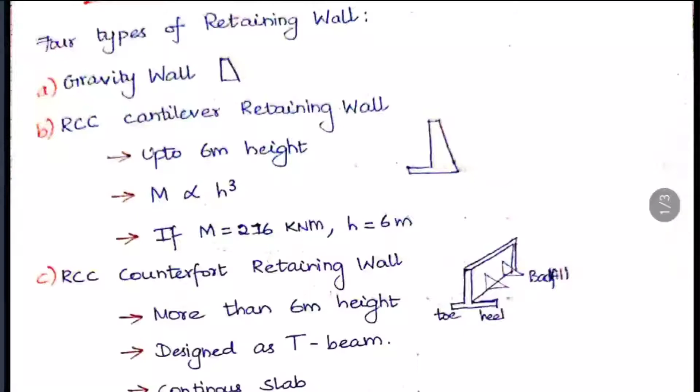So gravity wall is nothing but it is just like a wall like structure, so that it just obstructs or it just holds the soil in one side. And the next is the RCC cantilever retaining wall. So it has a cantilever slab like thing at the bottom, so that the holding capacity will be more for this type of retaining wall. So if the height of the retained soil is up to 6 meter, we will be going for this type of retaining wall.

So here they tell that the moment that is occurring here is directly proportional to the cube of the height of that retaining wall. So in general they have given this example, that is if the height of this is 6 meter, its moment will be 216 kilonewton meter. And then the third type is RCC counterfort retaining wall. So this type of retaining wall has to be constructed if the height is greater than 6 meter.

Okay, so this looks as a T-beam. So in the cantilever retaining wall we saw just one slab in this one side. So here there will be another thing also like T-like structure. In this T-like structure, the shorter thing will be called as toe slab and the longer thing will be called as heel slab. So this will be your heel slab and this will be your toe slab, and this straight part they will call it as the stem of the retaining wall.

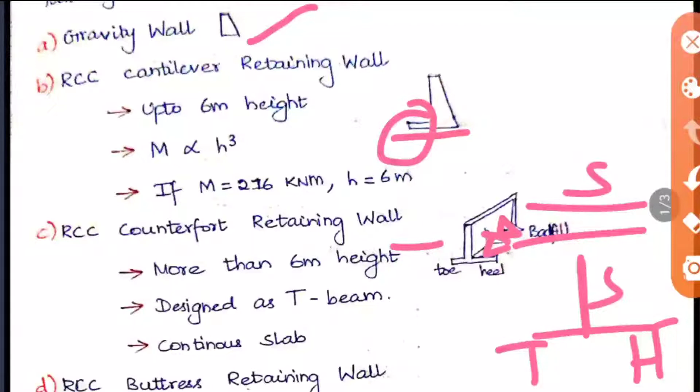The next type is the buttress retaining wall. So here it is designed as a rectangular beam. It is also similar to the counterfort retaining wall, but the only difference is, the counterforts we saw in the side of the backfill, that is in the side of the heel slab. In this case it will be in the opposite direction, that is in the toe side only the buttress walls will be there, and that side only it will be empty or having the water. So it is just an opposite structure here.

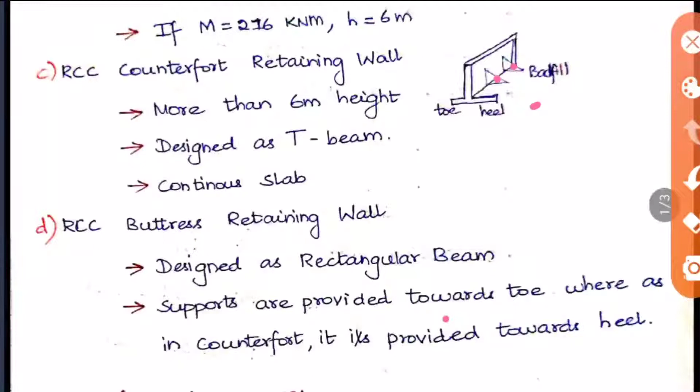So you can see the supports are provided towards toe, whereas in the counterfort it is provided towards the heel slab. So next we are going into the earth pressure. The coefficient of earth pressure is a term used here. It is denoted as K, which is equal to sigma H by sigma V, that is the horizontal stress sigma H and the vertical stress sigma V. This is considered in the soil that is retained in the retaining wall.

Okay, so there are three conditions: at rest, at active pressure, and at passive pressure. So first let us see at rest. At rest, the retaining wall will be stationary only, and there will be no lateral movements in it, so that there will be no yielding in the soil mass also.

So the condition is elastic equilibrium, that is, sigma H will be equal to sigma V. So both the stresses will be equal, so that it will be in a stable position. So here K is denoted as K naught, which is equal to mu by 1 minus mu. So mu is nothing but the Poisson's ratio of the soil mass, and which is equal to 1 minus sin phi.

And the next comes the active pressure. So the active pressure will be a lesser pressure than the pressure at rest. So here plastic equilibrium occurs, that is, the retaining wall moves away from the backfill. Okay, so if this is the retaining wall and here the backfills are there, it will move away from the backfill. So here the tension occurs, so the yield is happening due to the tension. So let us see how this happens.

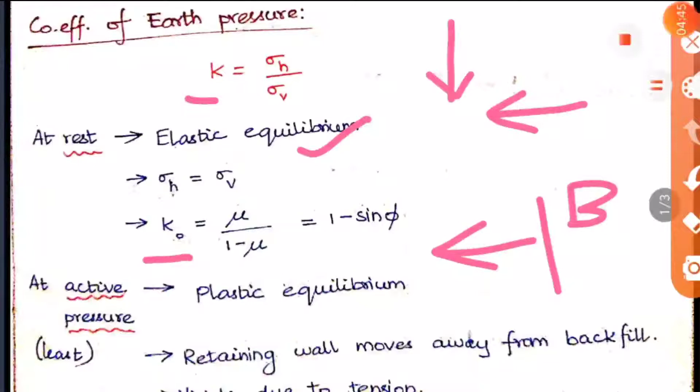So this is the retaining wall and this is the backfill area. Okay, so here sigma V will be greater than sigma H. That is, the vertical stress will be more than the horizontal stress. So when the vertical stress is more, the failure is downwards only, and also this structure moves away from the backfill. That is, the retaining wall moves away from the backfill.

So these 3 points are very important. You should know these 3 points in the case of active pressure and also in the passive pressure. That is, vertical stress is more here, the failure always occurs downwards, and the retaining wall moves away from the backfill. So these 3 you should know.

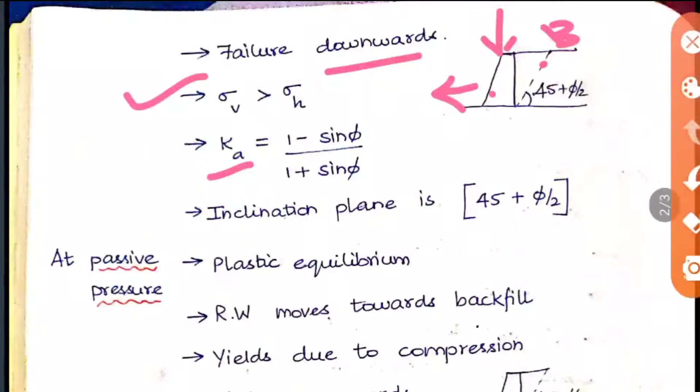So here K is mentioned as Ka, which is equal to 1 minus sin phi by 1 plus sin phi, and the inclination of the failure plane is 45 plus phi by 2. The angle is 45 degrees plus phi by 2.

The next one is the passive pressure. So here it is a plastic equilibrium only, and the retaining wall moves towards the backfill. In the previous case it is away from the backfill, here it is towards the backfill, and the yield is due to compression, whereas there it is due to tension, and there the failure is downwards, here the failure is upwards. So these points are very important.

Okay, so here sigma H is greater than sigma V. So in this direction or in this direction, sigma H will be greater than sigma V. Okay, so when the horizontal action is greater, the failure will be upwards, and also the retaining wall moves towards the backfill only.

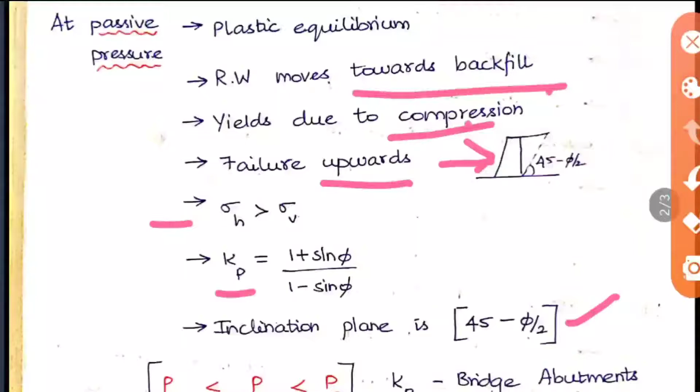So here it is represented as Kp, which is equal to 1 plus sin phi by 1 minus sin phi, which is the opposite or the inverse of Ka, because in Ka we saw it is 1 minus sin phi by 1 plus sin phi, and the inclination plane is 45 minus phi by 2, whereas there it is 45 plus phi by 2. So when you compare these both and study, it will be clear. So these 4 points are very important, they will be asking objective questions from these concepts.

And here the relation between the pressure and the coefficient of earth pressure is given. As I told before, the active pressure will be lesser than the pressure at rest, which is lesser than the passive pressure. And in the case of the coefficient of earth pressure also, it is the same. Ka is less than K0 and K0 is less than Kp. So here K0 is at rest. So normally for bridge abutments the case is at rest, for retaining walls normally it is active pressure, and for sheet piles it is normally passive pressure.

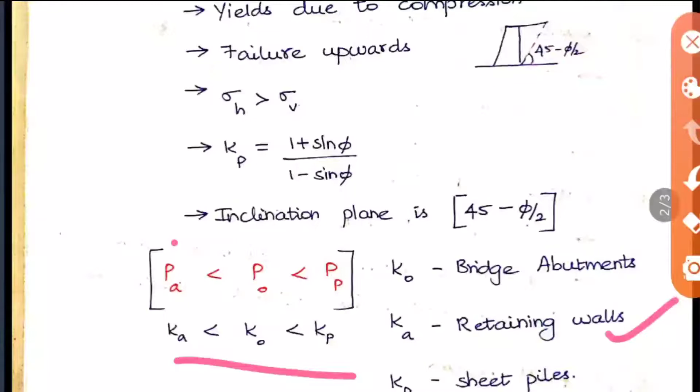Then comes the analysis of earth pressure. There are various analysis methods used here. The first one is Rankine's theory. In Rankine's theory there are some assumptions, so this is also important.

They consider the soil is homogeneous, dry and cohesionless, the ground is horizontal or inclined, and the retaining wall is smooth and vertical. This is important. Then plastic equilibrium occurs here. They also define Ka equal to tan²(45 − φ/2), and Ka into Kp is equal to 1. We saw this already: Kp is the inverse of Ka, so multiplying them we get 1.

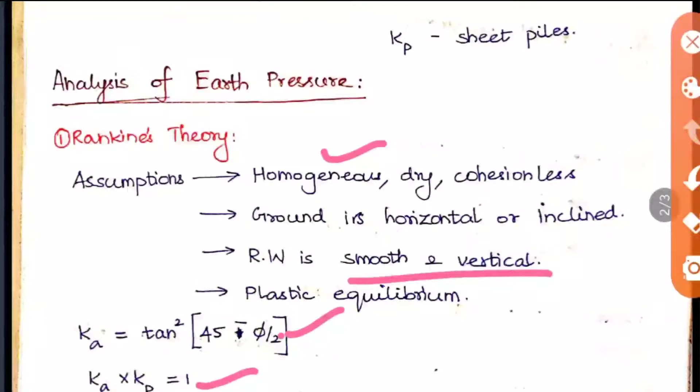The next one is the effect of cohesion. Here the passive and active pressures are given in terms of cohesion: Ka σv − 2c√Ka, and Kp σv + 2c√Kp. They will ask questions like how the active or passive pressure gets affected by cohesion.

You should answer like this: due to cohesion the passive pressure will be increasing, and due to cohesion the active pressure will be decreasing, because here minus and here plus is there.

The next is the tension crack depth, defined as Zc. What does tension crack depth mean? Because of the negative pressure, a tension crack occurs in the soil near the top of the wall at a depth of Zc. This depth we call the tension crack depth, which is equal to 2c/(γ√Ka), or 2c/γ into tan α.

The next term is Hc, that is critical height. It is related to this. It is the height up to which we can excavate the soil without support. If we excavate without support, at a certain point sliding of the soil happens. Up to that point is called the critical height, which is equal to 4c/(γ√Ka). Comparing both, you can write it as 2 into Zc.

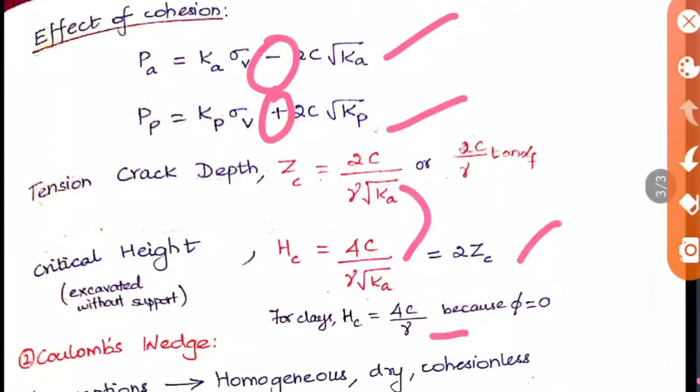The next theory is Coulomb's wedge theory. Here the assumptions are the soil is homogeneous, dry and cohesionless. The retaining wall is rough, whereas in Rankine's theory we assumed the retaining wall is smooth. These are important points.

Then the lateral pressure acts at an angle δ. These δ values are very important in Coulomb's wedge theory, so you should study them. For smooth walls it is φ/3. For retaining walls and concrete walls it is 2φ/3, which is Terzaghi's value. For a backfill subjected to vibration it is 0, and for rough walls it is 3φ/4.

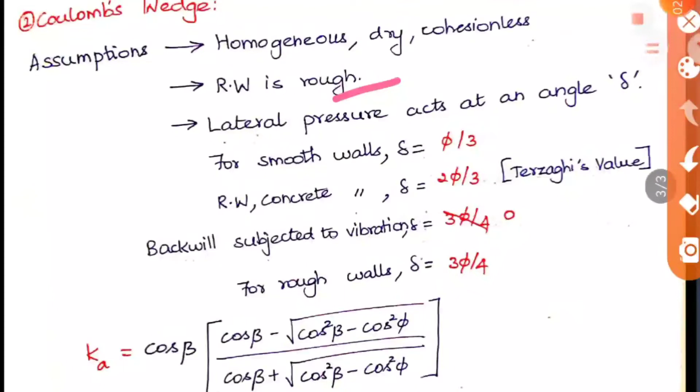Then the Ka and Kp formulas are given based on Coulomb's wedge theory: cos β into (cos β − √(cos²β − cos²φ)) / (cos β + √(cos²β − cos²φ)). These formulas will not be asked for calculation, but they may ask the direct formula as an objective question. Only the minus and plus symbols change in the case of Kp.

Then there are 3 other methods: Rebhann's method, Culmann's method and Poncelet method. These 3 are graphical methods, also based on Coulomb's theory. The outcome of Rebhann's method is the Poncelet method, so these both are the same.